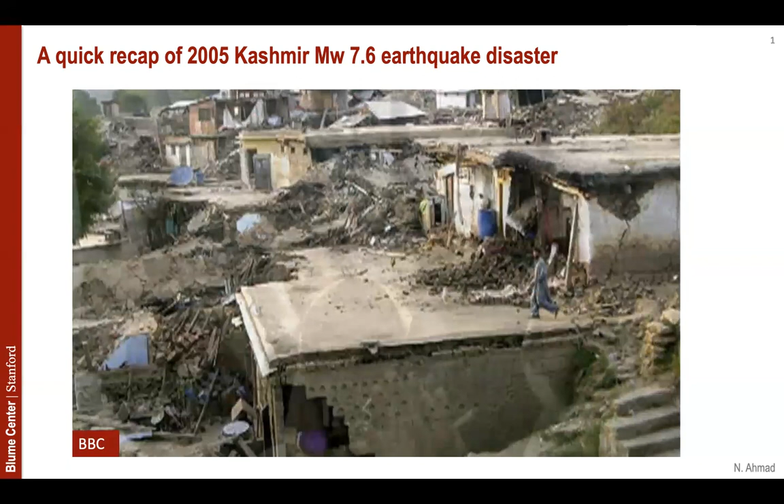Of course, as an authority, we will never wish to have a crisis situation like this again, and one can easily realize that there is a very important role that engineers can play in reducing the risk. Because it's not the earthquake that kills people, but actually it's the building that collapses and causes fatalities.

Here I'm showing two documents. One is published in Natural Hazards in 2014 that I authored with my past supervisors, Professor Qaisar Ali from UET Peshawar, Professor Helen Crowley, and Professor Pinho from Rose School. They describe the methodology in more detail. In another, more recent article that I authored with Professor Deierlein from Stanford University, it shows the application of the method for derivation of fragility functions for reinforced concrete frames. My talk is mainly based on this recent article to briefly describe the key components of the method.

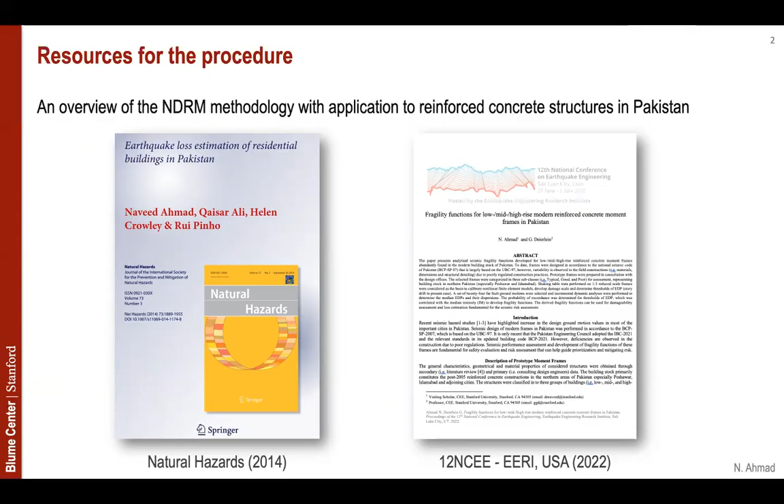It's important to understand why the method is needed. We have to understand that there is no single value when we determine the seismic hazard and structural capacity. There are various possible outcomes, and we have to present the answer using the knowledge of probability.

Unfortunately, for the same reasons, we cannot use past observations, mostly the empirical methods, to predict the future, because the structure may change with time with the introduction of new materials and structural systems. So we need methods and tools that can realistically simulate the nonlinear and dynamic response of the structures.

This motivated me to develop the probabilistic nonlinear dynamic reliability-based method, called NDRM, for seismic vulnerability assessment. We will see in this presentation that it is used for the derivation of fragility functions.

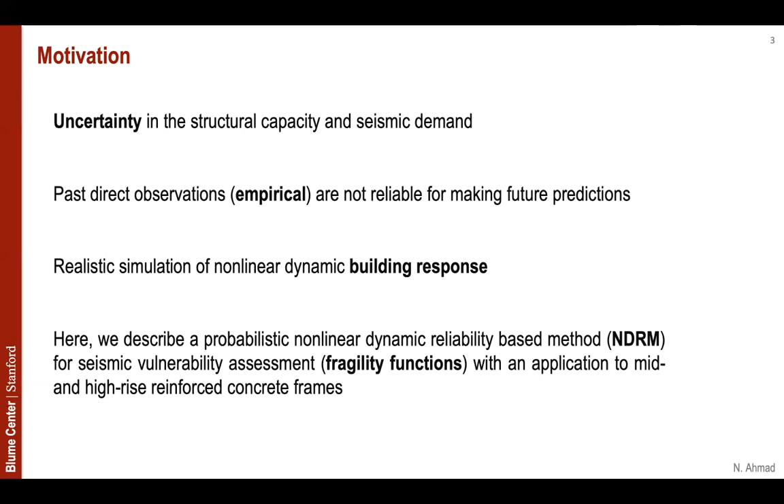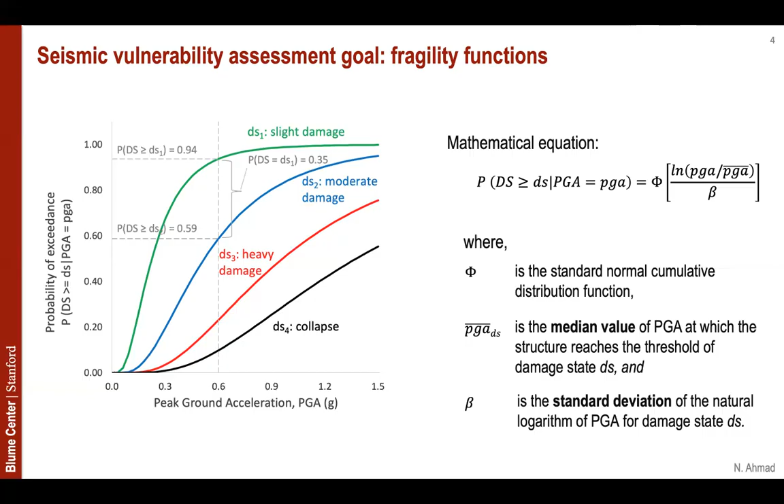One can argue that codes developed can reduce risk, but codes and guidelines have existed in the region since the 1931 earthquake. Whether in the form of a simplified guideline or a more formal code, they have performed exceptionally well in saving lives and reducing property damage. However, these codes were followed only in certain cases and were never disseminated to other parts of the country. Over time, much control on construction was lost in these areas, so despite the codes, many lives were lost in recent earthquakes.

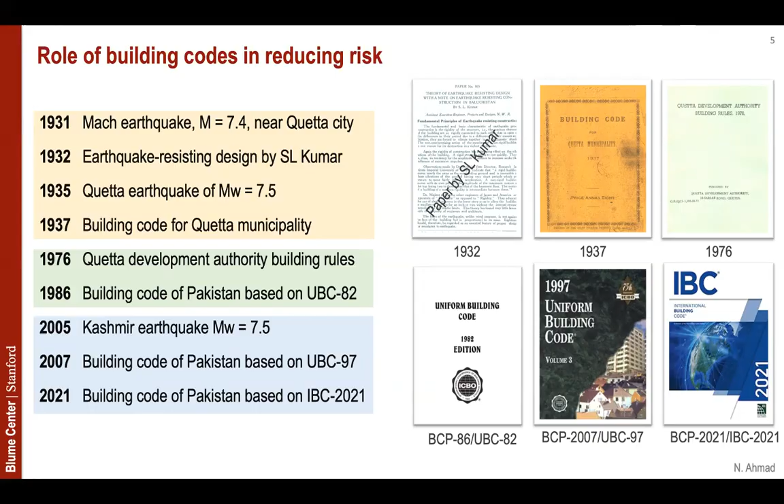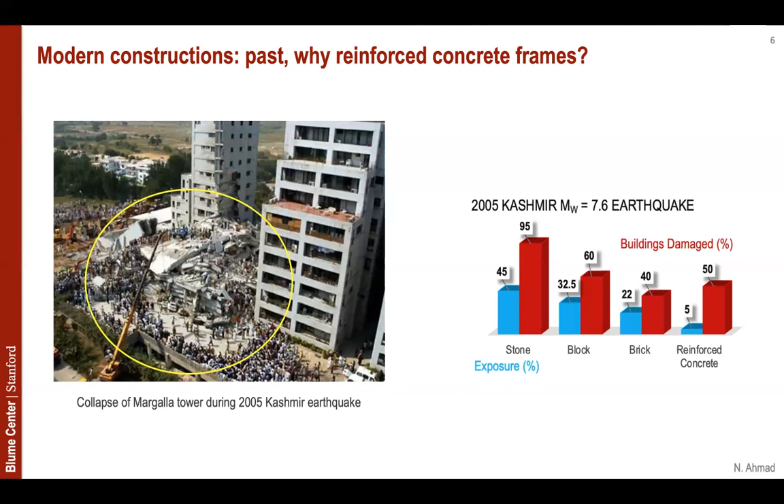Even now, if we visit construction sites, we can find a number of deficiencies in the majority of constructions. To report a few, I'm referring to the work of Yasir Irfan Badrashi, a PhD student at UET Peshawar. He surveyed a number of construction sites and found common deficiencies like poor quality concrete due to improper mix and compaction, use of non-seismic hooks, lack of ties in beam-column joints, improper location and detailing of lap splices, and haphazard placement of stirrups at larger spacing. Based on past experience, we know these were the main drivers increasing the vulnerability of RC frames.

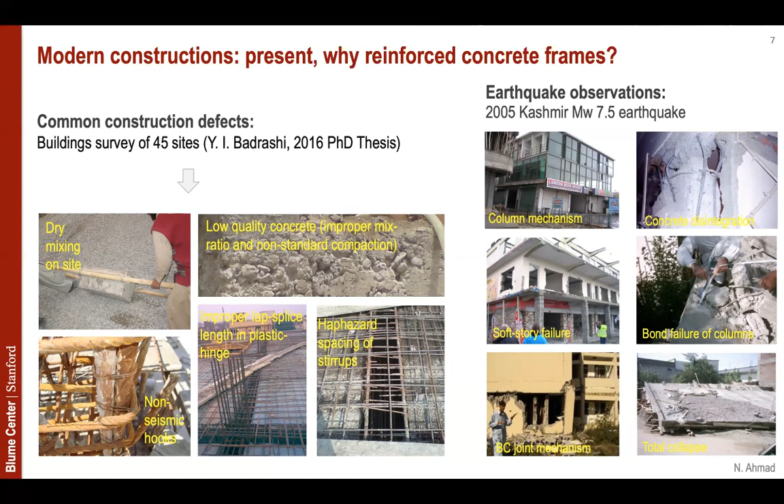So how can we assess the vulnerability and obtain fragility functions? Of course, the very first thing is to know how much resistance and deformability are present in our structural system. For that, it becomes important to perform experimentation on structural components and systems to obtain region-specific material properties.

Here I'm referring to experimental work performed by Professor Qaisar Ali along with his students, testing a beam-column subassembly to understand the damage mechanism and obtain the force-displacement hysteretic response shown in the figure on the right. The experimental result is compared with the response of a more standard strong-column, weak-beam counterpart system with an elastic beam-column joint. We can clearly see that such an idealization can reasonably predict the stiffness and strength of the system, but it grossly overestimates the energy dissipation because it misses the pinching behavior of the hysteretic response and the deterioration of strength and stiffness. To address that, we need to develop more realistic numerical prediction models.

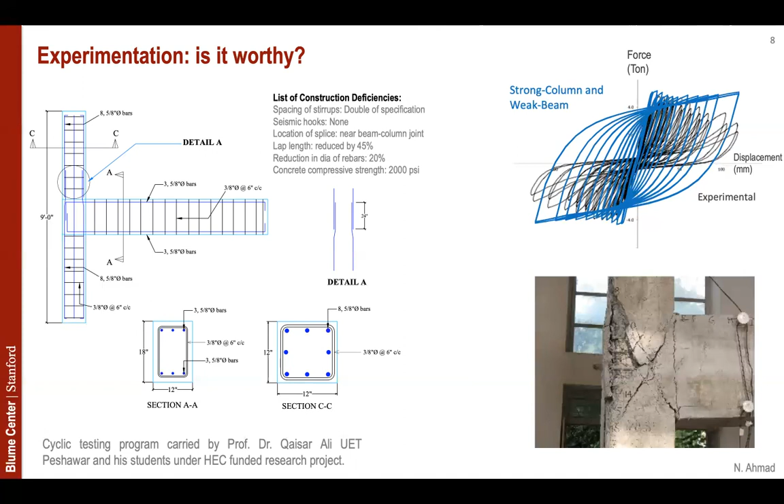To understand the behavior of indigenous RC frames, we started an experimental program and tested 12 full-scale beams at UET Peshawar. What we found interesting is that there is a lot of deformability and flexibility coming from fixed-end rotation due to inelastic extension of rebars, bond failure, and rebar slip. This was adding to the force-displacement response of the RC member and resulting in the pinching behavior in the hysteretic response.

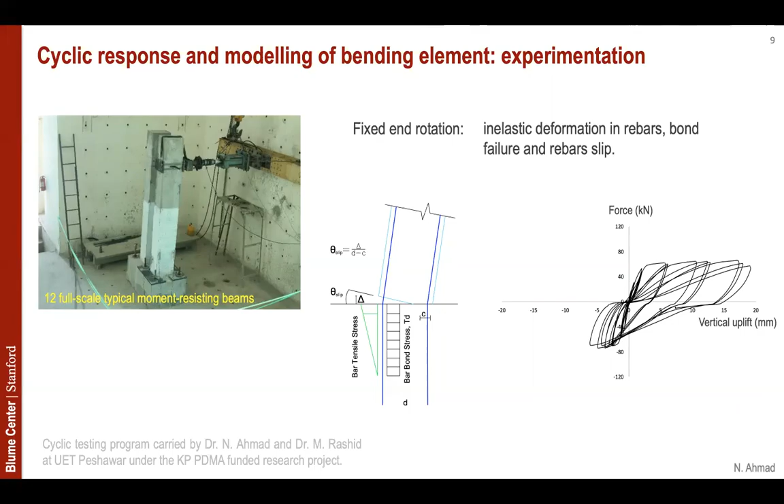So we used that information to guide a numerical modeling technique to develop a more accurate nonlinear numerical model. What we did was add a concentrated plasticity hinge at the ends of the member. The member was modeled with a more conventional inelastic fiber section-based element, available in most finite element programs like OpenSees and Seismostruct. The hinge was assigned a trilinear force-displacement response to simulate various local damage mechanisms, for example cracking, yielding, and rocking. The hinge was also assigned a pinching behavior to simulate the opening and closing of the gap due to rocking.

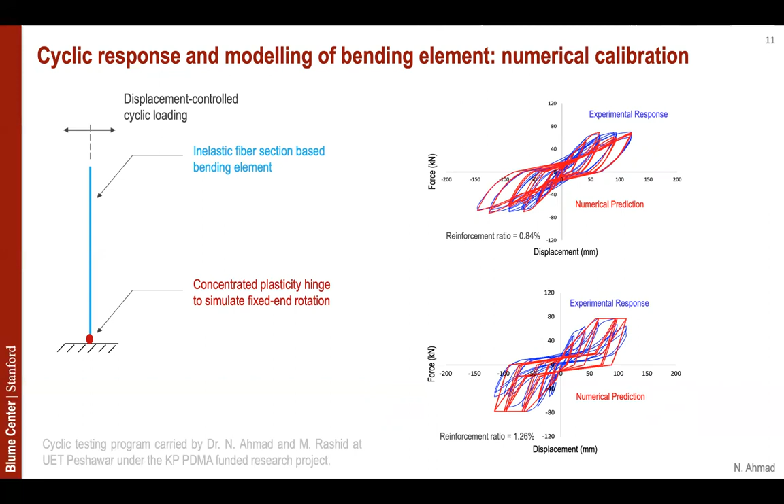We studied the effectiveness of the additional nonlinear hinge in simulating the cyclic response of RC beams. Here, in the figure on the right, we see a comparison of the numerical prediction to the experimental response for beams with the most common reinforcement ratios. We can appreciate how the numerical model mimics the cyclic response of the beam. Performance is relatively better for beams with low reinforcement ratio; however, some discrepancies can be observed for beams with higher reinforcement ratio. Still, there is a clear advantage in supplementing the fiber section-based element with an additional plasticity hinge to accurately predict the nonlinear response.

So we came back here to our previous problem to see how this additional information can guide the numerical modeling of a more complex beam column joint. We modeled the beam and column member as an inelastic fiber section-based element. We added the same plastic hinge at the member ends, and also added another nonlinear hinge to simulate the shear deformation of the joint panel.

We can consult a number of literature on how to develop this shear deformation hinge for the panel. Now here in the figure on the right, we can see a much better prediction of the cyclic response of the beam column subassembly, where the improved numerical model can predict pinching in the hysteretic response and the deterioration of the strength and stiffness much better than the idealized model considering a strong column and weak beam model with elastic beam column joint.

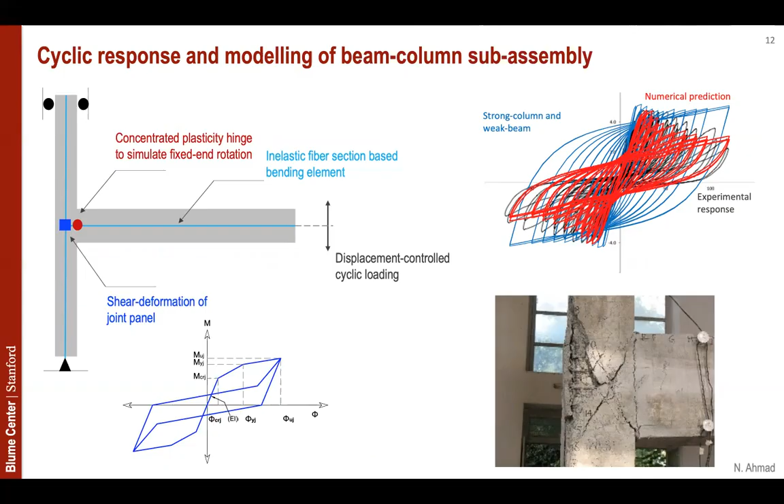To better understand the impact of constructive deficiencies on the seismic behavior of frames, I myself, along with Professor Akhtar Naeem Khan and Dr. Rizwan, started an experimental program to perform shaking table tests on frames. I want to play this 20-second video to show you the performance of a code-conforming frame subjected to seismic ground motions, which is Northridge 1994 in the present case.

The outcomes of the shaking table test was the computation of the overstrength factor and the ductility of the frames. They collectively define the response modification factor given in the figure on the right. We can see that a code-conforming frame can achieve an R factor close to what a code expects from a code-compliant structure. However, the factor reduces significantly when deficiencies are included in the frame.

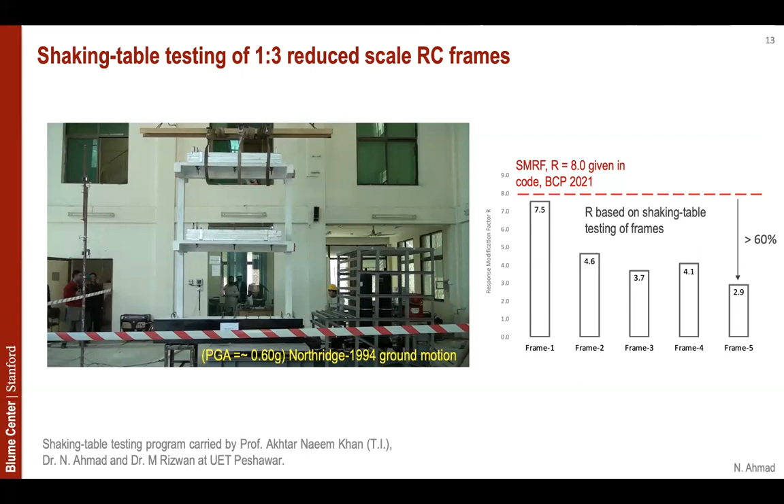The objective of all the experimental testing programs was to collect information that can guide the numerical modeling of indigenous reinforced concrete frames. The numerical modeling technique was validated in predicting the displacement response of the frame.

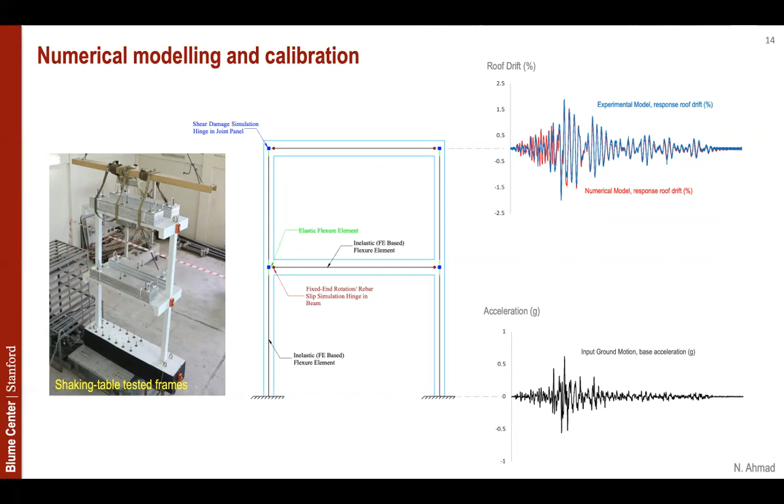Here in the figure on the bottom right, we see an acceleration history that was input to the model. And in the figure on the top right, we can see the comparison of the predicted to experimental displacement response. We can see that the numerical model is doing very well in predicting the response of the frame.

Once we develop the numerical modeling technique for analysis, the next question is what structures are analyzed for vulnerability assessment and derivation of fragility functions that are applicable to a portfolio of structures at a large scale.

So we generated a number of structure models based on the data collected from the literature review and from field observations. In the present case, we consulted a number of design offices in northern areas of Pakistan, especially Peshawar and Islamabad, to get the variation in the constructions.

The structures were classified based on height, for example low rise representing 1 to 3 stories, mid rise representing 4 to 7 stories, and high rise structures having stories more than 8.

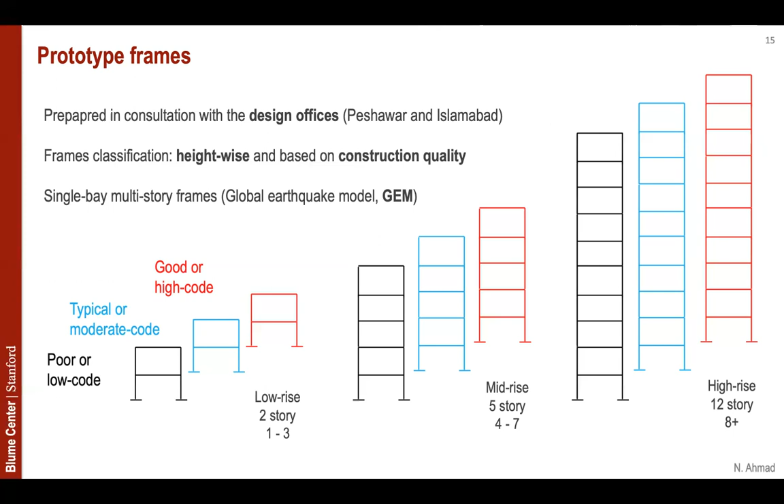We subdivided these into 3 categories, including good quality constructions representing high code structures, typical construction representing moderate code structures, and poor quality constructions representing low code structures. This type of idealization is also proposed in the vulnerability assessment guidelines of the Global Earthquake Model.

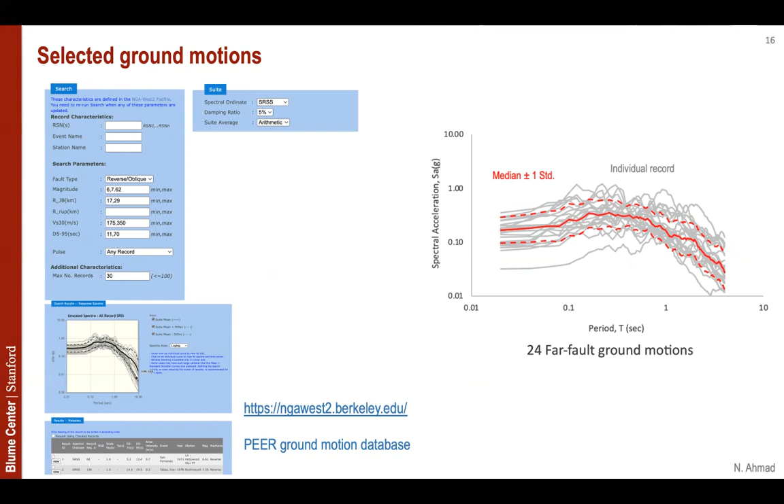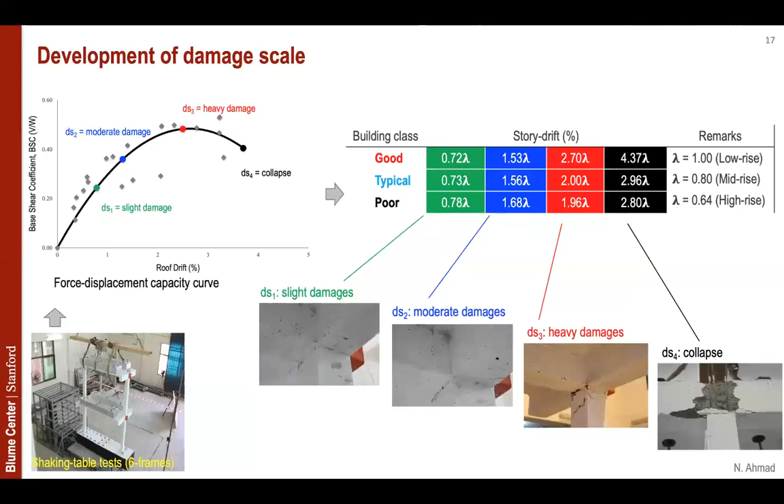The next important step is the development of a damage scale based on experimental tests. In the present case, we use the data from 6 shaking table tests performed on RC frames. The objective was to develop the base shear and lateral displacement response of the building and to identify various damage states, for instance slight damage, moderate damage, heavy damage, and collapse.

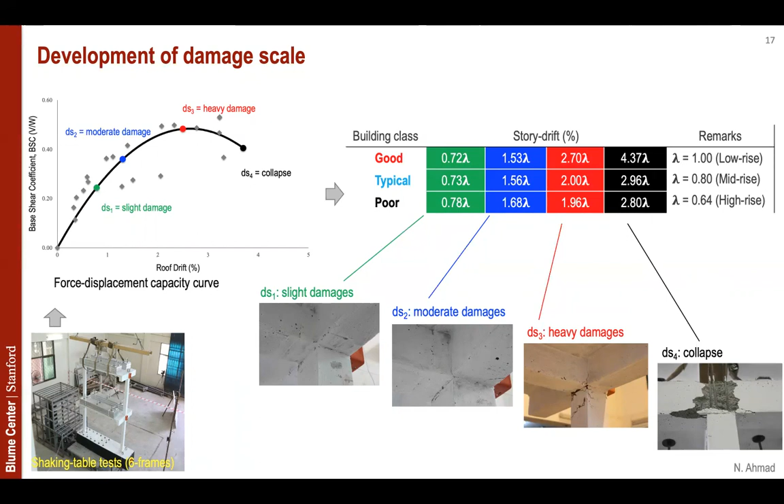Using that information, we proposed drift values for each damage state. Some adjustment was proposed to account for the variation due to higher gravity loads for mid and high-rise frames.

Here is the final framework of the NDRM that combines all the information. We prepared the region-specific numerical models and took the selected set of ground motions that was input to the numerical models. We linearly scaled the ground motions for dynamic analysis.

The objective here is to obtain the median value of the story drift demand and the associated standard deviation of the log values of the drift. The drift demand and drift capacity are combined through convolution to obtain the probability of exceedance.

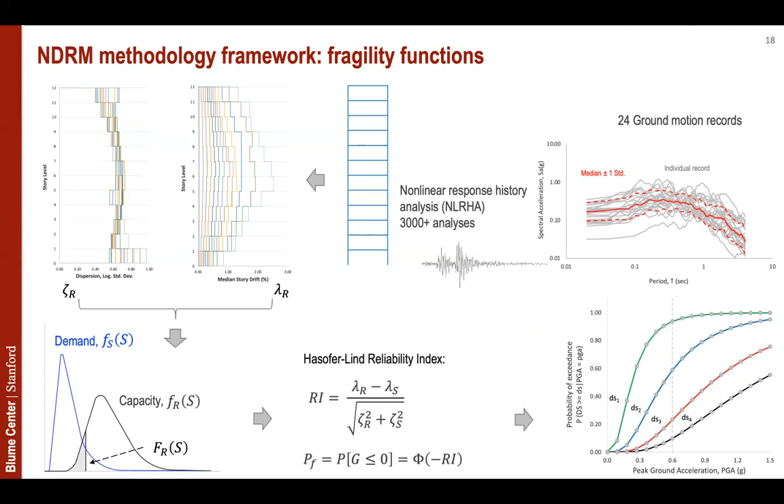The method uses the Hasofer-Lind reliability index to compute the probability of exceedance of different damage states at a given PGA. We can obtain the values of the probability of exceedance at different values of PGA to construct the fragility function given in the figure on the bottom right.

Using the procedure, we derive fragility functions of all 9 groups of structures, including low-rise, mid-rise, and high-rise structures. Let's focus on the fragility function of low-rise structures.

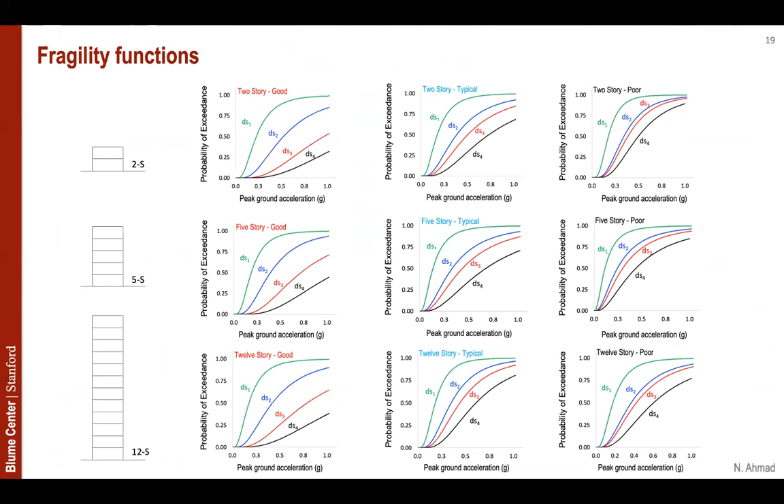In the figure on the left, we have fragility of low-rise structures of good quality construction or high code structures. In the figure on the right, we have fragility of low-rise structures of poor quality construction or low code structures. Taking the PGA value equal to 0.6, which roughly corresponds to the MCE level ground motions...

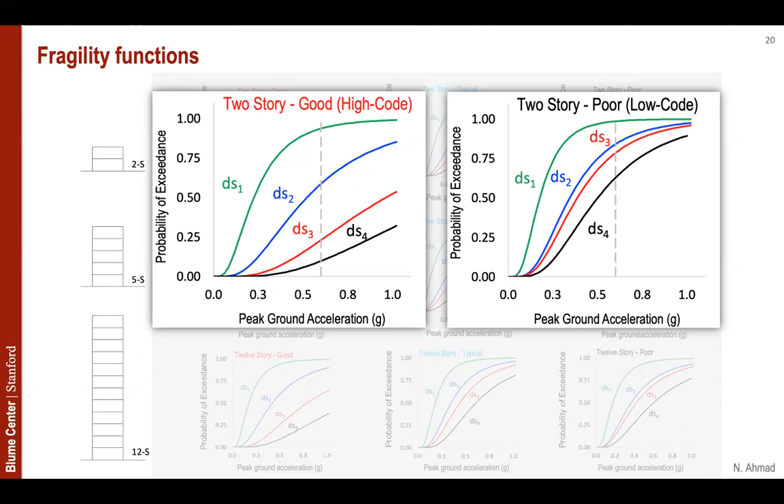We can see that the probability of exceedance for different damage states is much lower in case of good quality construction in comparison to low quality constructions. This is because of the higher resistance and ductility of good quality constructions.

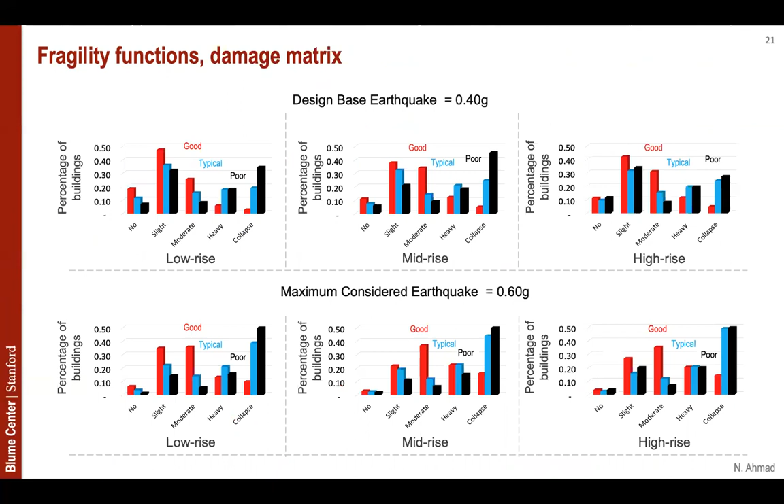We can also look at the damage matrices using the fragility functions. Here we obtain matrices for both the DBE and MCE level ground motions. Let's have a close look, especially at the low-rise and high-rise structures.

What is interesting to note here is that the probability of collapse for both the low-rise and high-rise structure is close to 0.1, which is the value we can expect for code-conforming structures. However, the probability of exceedance increases as the quality of construction declines from good to typical to poor, as the required strength and ductility of these structures reduce significantly.

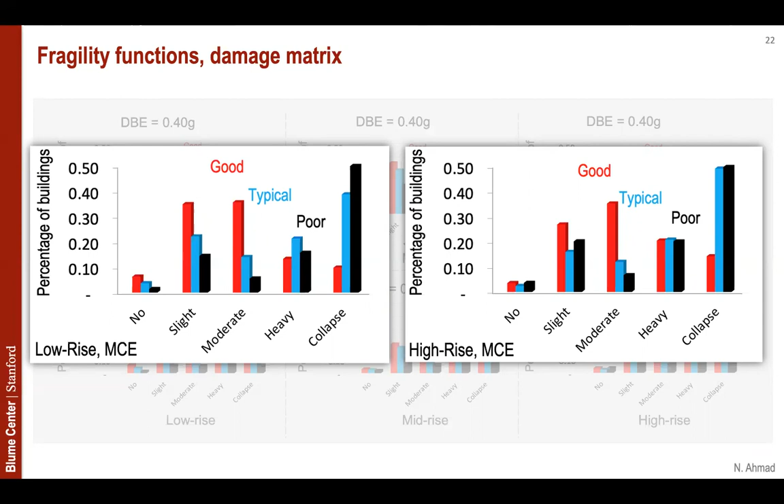We also look at how these functions compare with the functions given in the HAZUS framework, which is a more standard method used in the United States and other parts of the world for risk assessment.

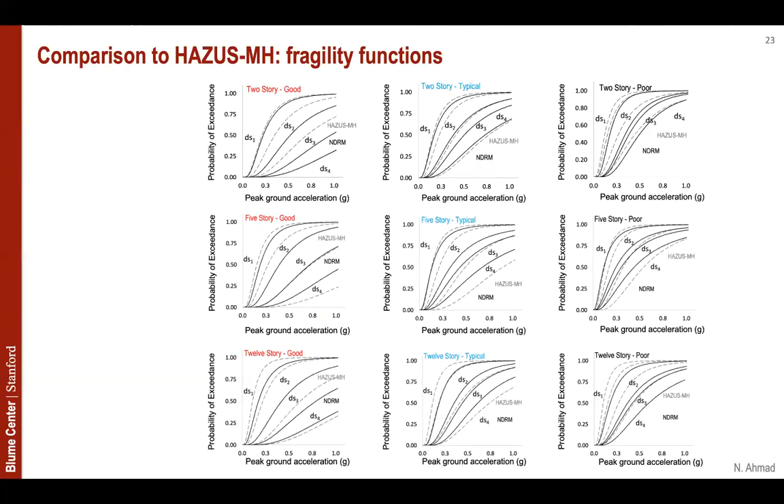Let's focus on a few structures here. We look at the 2-story and 12-story good quality constructions, or code conforming structures. If we look at the collapse fragility, especially DS4, we can see that both methods give very similar results.

However, if we compare other damage states, especially moderate and heavy damage states, we can see some differences. Of course, this is because of the differences in the damage scale of the two methods. Our damage scale was based on shaking table testing of 2-story frames, while that of HAZUS is not much clarified.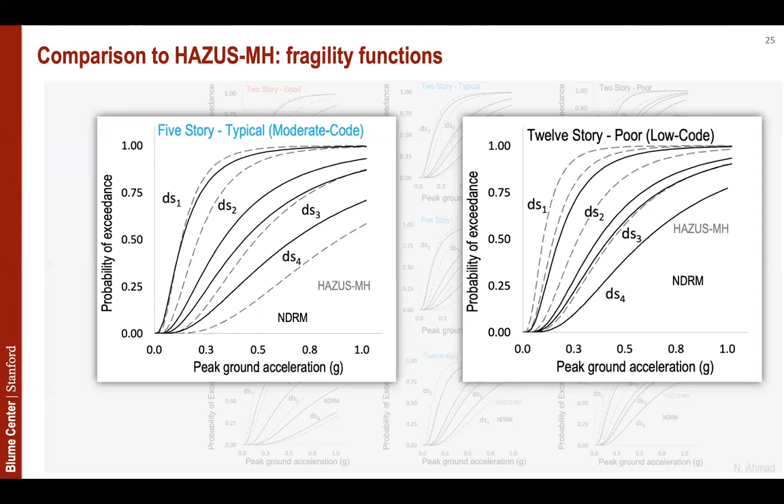We can easily see that in some cases HAZUS gives quite different results for damage evaluation. For example, in case of the 5-story typical, it is underestimating the probabilities, while in case of the 12-story poor, it is overestimating the probability.

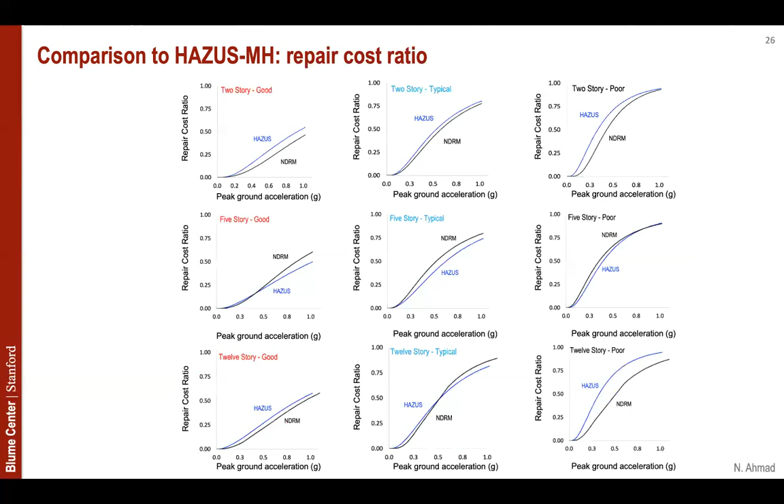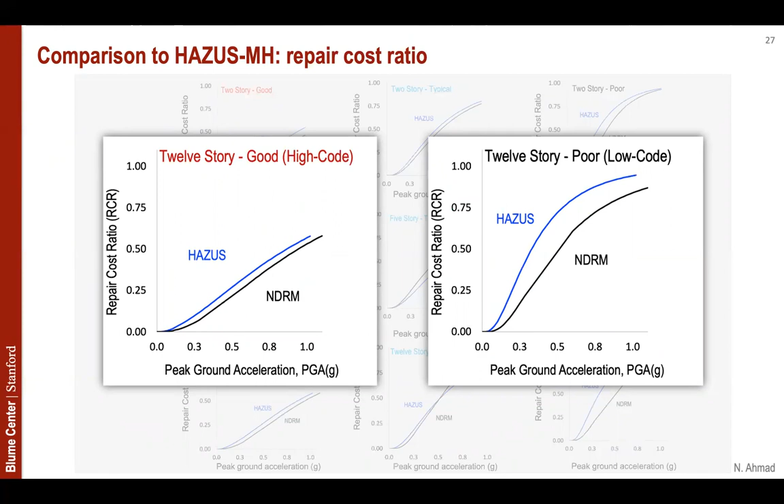If we look closely at the high-rise structures, we can see that HAZUS only slightly overestimates the repair cost ratio, but it significantly overestimates the repair cost ratio in case of low-code structures. This clearly demonstrates that there is work needed in developing region-specific fragility functions.

To conclude, I would like to share some of the observations made over the course of this research. The first and most important learning is that besides developing code, it is strongly necessary to enforce code. Only then can it be promising in reducing the risk.

Next, as we see, the comparison of our fragility functions with those given in the HAZUS framework reveals similarity in some cases, but also differences in a few other cases. That encourages the development of region-specific fragility functions.

Also, as you notice, the proposed method is highly dependent on the accuracy of the numerical models. Thus, it is important to perform experimentation on region-specific materials and structures.

Finally, I will recommend that research and development institutions should upgrade their computation capabilities to accommodate more computation programs and tools to advance research in the universities.